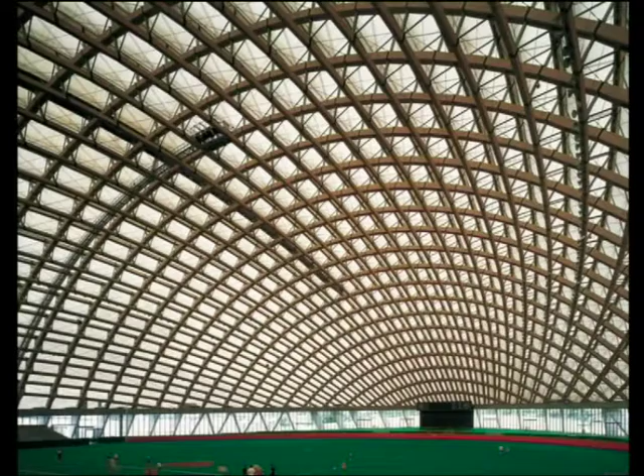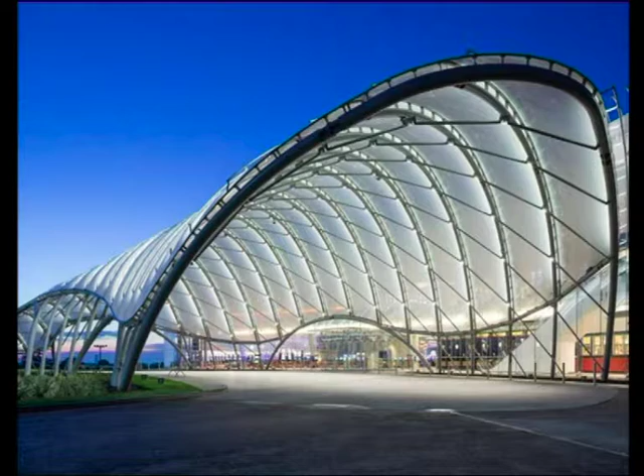So let us get into long span structures. We saw that long span structures can be classified into various types, with different forms, sizes, shapes, and materials. We also saw the early beginnings from the cathedrals and churches built during the Renaissance and Gothic periods. From there till today we have so many massive long span structures based on our functional requirements, congregational requirements, and the size and volume of activities we operate today.

Now we are going to look at long span structures and divide them into different types, but before that we should first understand the different kinds of loading which act on a long span structure.

The first load in any structure is always the dead load of the structure itself, because any structure is made up of some material, and that material has a certain weight which acts as the weight of the structure. Usually dead loads make up most of the loads in many structures, and similarly, long span structures also have dead load as a major component.

Next is the live load. Live load is the sum of all loads which can be moved into and along the building—for example, people, furniture, partitions, electrical equipment, mechanical equipment, and service equipment put onto the building which can be moved from one place to another at some point in time. Live loads also come up to a good amount when you take loading action into consideration.

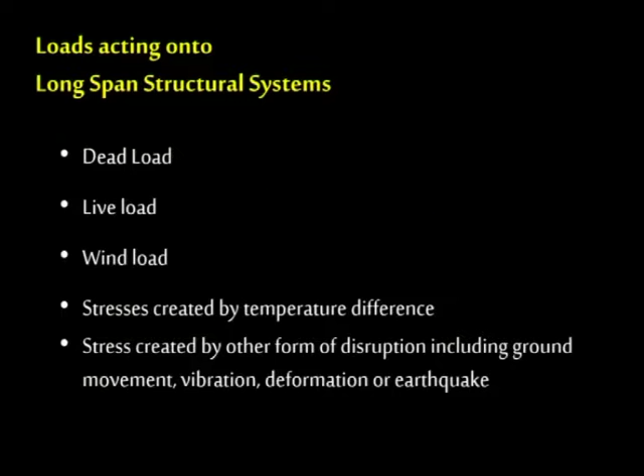This also has some loading action. There are other sources, created in the form of disruption, including ground movement, vibration, deformation, earthquakes, and other forms of natural disasters. All these loads are calculated into a large span structure to make it efficient and usable over a long period of time.

If we are to divide long span structures into different systems, we have four major categories of systems: form active systems, vector active systems, section active systems, and surface active systems. We will look at each of these systems in detail.

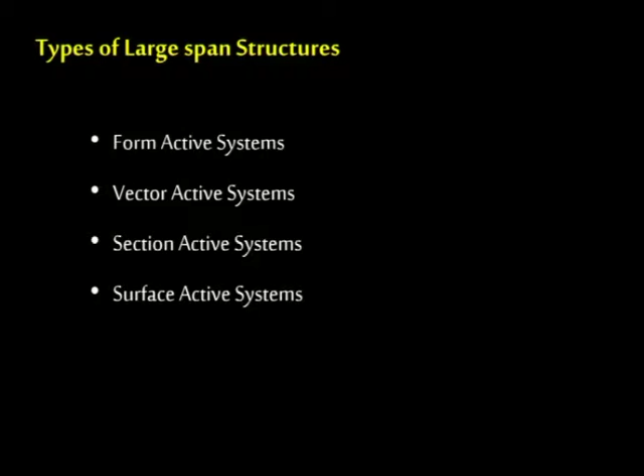First up, we have form active systems. Form active systems are systems of flexible, non-rigid matter in which the redirection of forces is effected by a particular form, design, and characteristic form stabilization. In simpler terms, any element will have a certain form, and the form creates certain strength to the overall structure, in which the structure itself can be flexible. It could be non-rigid, in which the forces can be redirected or changed from one direction to another by a particular form of design.

For example, tent structures. In a tent, we see a mast and then the cloth which forms the element. So these are flexible, non-rigid. At the same time, the overall structure is stable only because of the form of the elements which are in action. Form active systems are again divided into many types of structures: cable structures, tent structures, pneumatic structures, and arch structures.

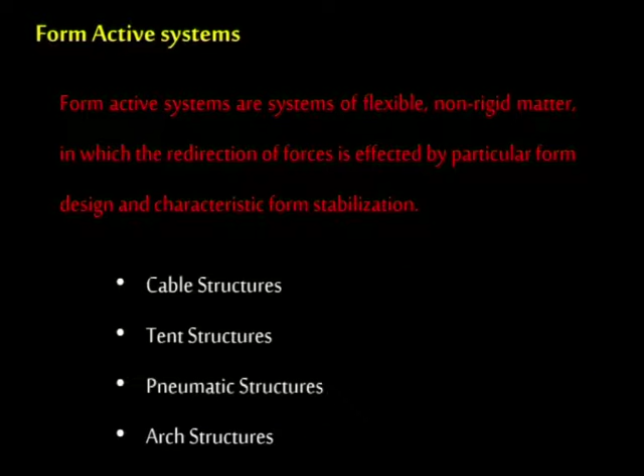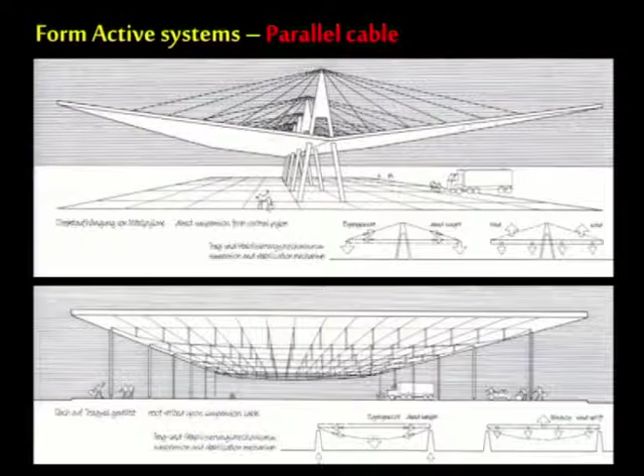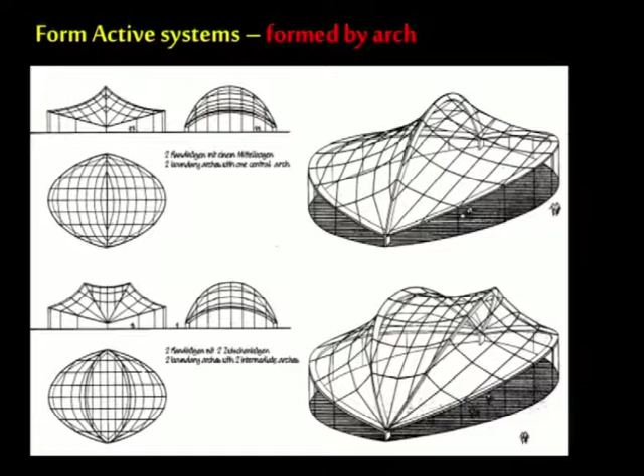Let us look at some examples of each of these structures. These are cable structures, and the picture on top is a parallel cable structure. These are structures formed by an arch action. There is an arch, and the arch is expanded, contracted, made larger, made smaller, and arranged in different sizes and locations. And voila, the structure is formed by a series of arches.

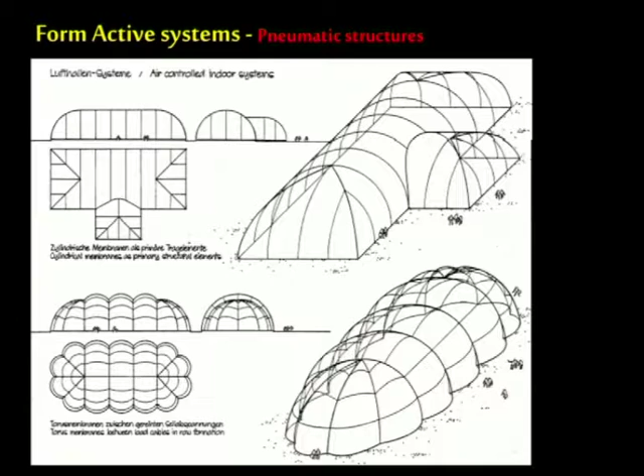These are tented structures, masted structures, multiple tent structures. These are pneumatic structures. Pneumatic structures are structures in which air is controlled inside the element, and we will be looking at pneumatic structures in detail at the end of this same episode.

The next system we are going to look at is vector active systems. Vector active systems are those that have short, solid, straight, linear members in which the redirection of forces is effected by vector partition, that is, by multi-directional splitting of a single force simply into compression or tension elements.

These are elements where the overall structure is divided into multiple short, solid, straight elements. If there is a big element, the element itself is made up of short, small elements, in which the forces are completely redirected within the whole system such that the forces are split into different members. Some members will take tension and some members will take compression.

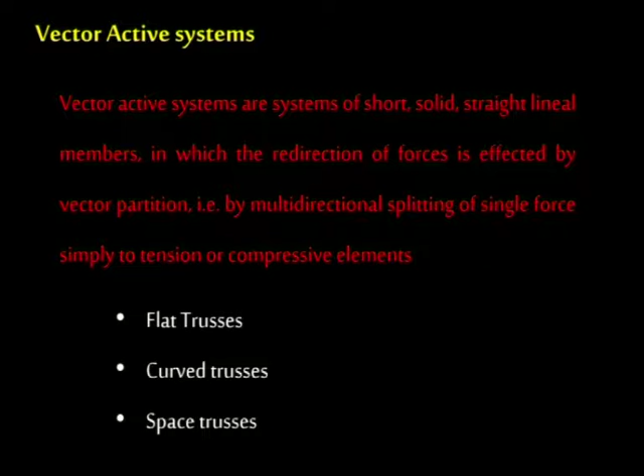For example, trusses. Trusses are the best example for vector active systems. We have different kinds of trusses: flat trusses, curved trusses, space frames, space trusses. We are looking at some pictures of trusses.

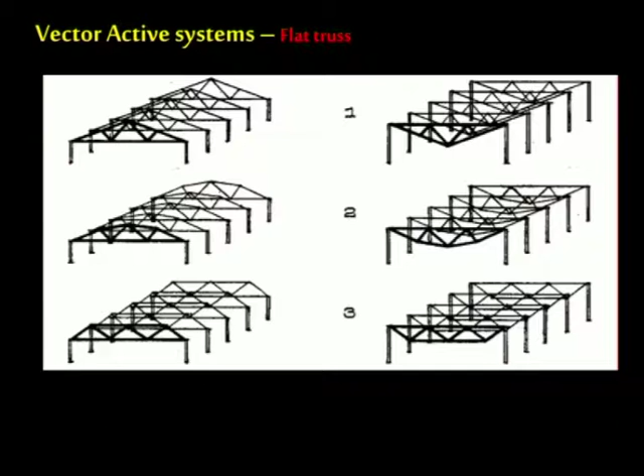These are flat trusses, for example. There are different types of flat trusses: those which have a triangle with the apex on top, and those with the triangle apex at the bottom. And there are curved trusses where we can have a curvilinear roof on top.

Even though these are straight elements, different straight rigid struts which form the overall curve, if you look at the overall form, it looks like an arch, like a curve. That is why we call it curved trusses, even though none of these little elements are curved. All of these elements are straight lines.

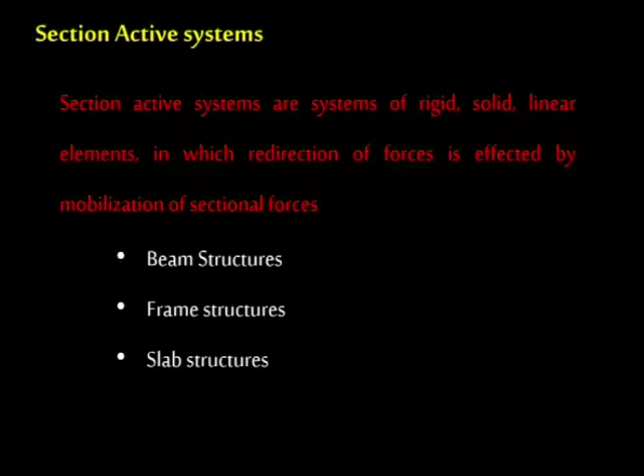The next type of system is section active system. These are again systems of rigid, solid, linear elements in which redirection of forces is clearly effected by simple mobilization of sectional forces. For example, we have slabs, beams, and other frame structures where they are not small items like a truss, they are rigid, solid items, but pretty huge, not small elements.

A column can be as small as a 3-meter column, or it could be something massive like a 12-15-meter column or even more. Similarly, beams can be 3 or 4 meter beams, or it can even be 12-meter, 15-meter beams, depending upon the size, depending upon the loading pattern.

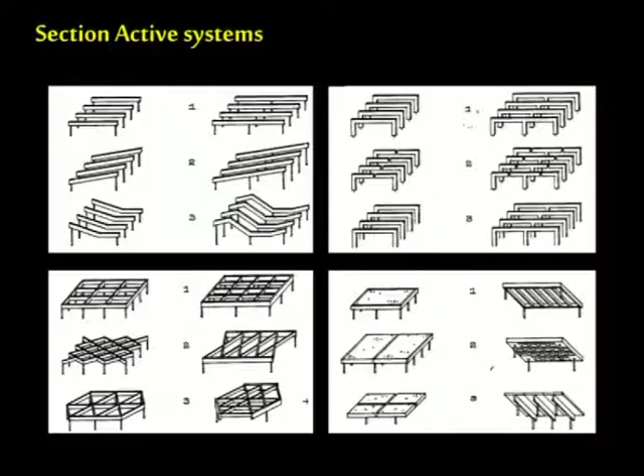Here, the redirection of forces is effected by mobilization of sectional forces. The beam shall have a section, and the section itself will carry both compressive and tensile loads. These are some of the section active systems: beams, slabs, lattice beams, different sectional beams, single section, dual section, slabs. These are sections of a section active system wherein you can see the load action clearly being transferred from a slab to a beam to the next element below.

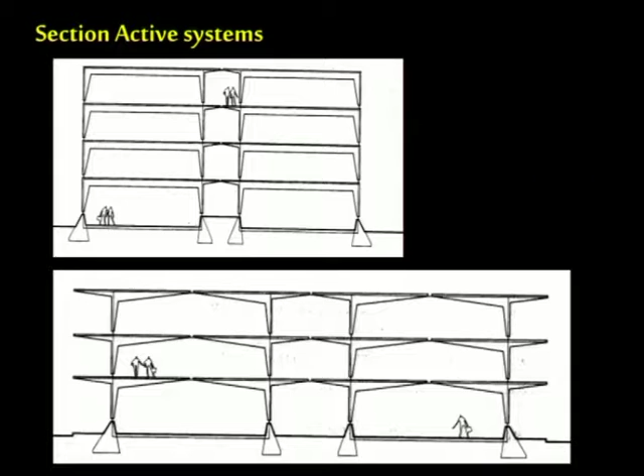The last and final system we are going to look at today is surface active systems. These are flexible or rigid elements, planes, that are able to resist tension, compression or shear, in which the redirection of forces is affected by mobilization of sectional forces.

For example, we have folded structures. We looked at folded plates in the previous episode, where a plane of paper is not able to take up any load if it is flat. At the same time, when that plane of paper was folded multiple times, it was able to take immensely huge loads which we did not expect it to take. Such is the effect of a surface active system.

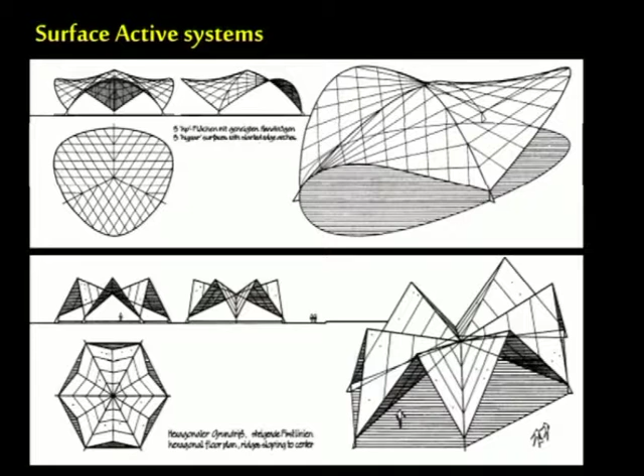These are some of the surface active systems, and these again are some other examples of surface active systems.

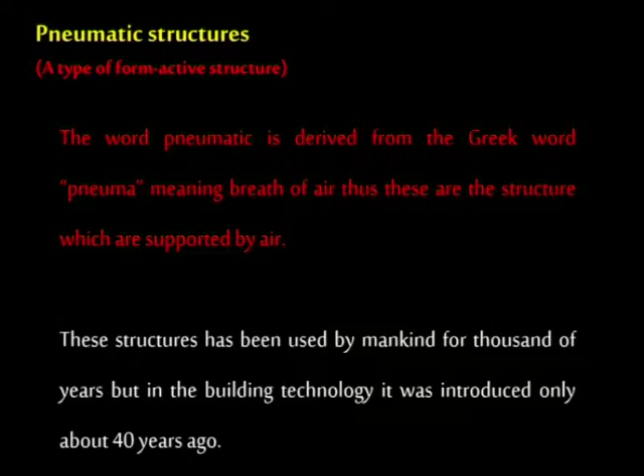Now let's look at pneumatic structures in detail. Pneumatic structures are a type of form active system. If we remember our four main classifications, form active systems were the first of the four, and we saw pneumatic structures as one of the examples of form active systems. If you look at the etymology of the word pneumatic structures, the word pneumatic is derived from the Greek word pneuma, meaning breath of air.

Thus, these are structures which are clearly supported by air. These structures have been used by mankind for thousands of years in building technology, but they were introduced to us in the construction field only about 40-45 years ago. Now let us look at the fundamentals and principles of pneumatic structures, and see how it works.

Its principle is simple. It uses a relatively thin membrane supported by a pressure difference. There is air outside the membrane, there is air inside the membrane, and there is a pressure difference between these two, and that pressure difference is what keeps the membrane afloat.

So through increasing the air pressure inside, there are two real advantages which we get. The dead weight of the space is clearly balanced, because the weight of the substance is not directly taken by the load itself, but because of the difference in air pressure, the dead weight is balanced. The membrane is stressed to the point where it cannot be indented by asymmetrical loading.

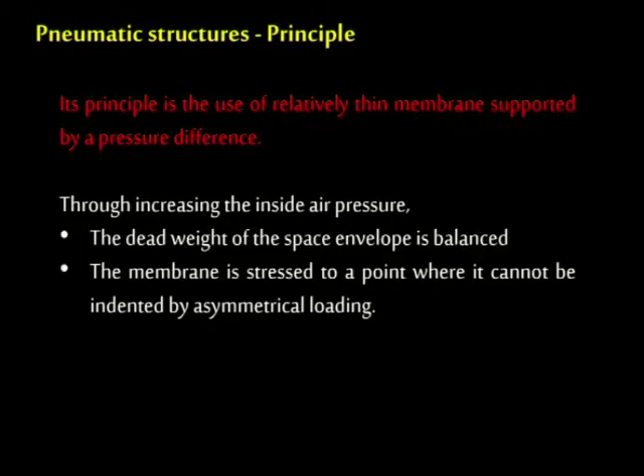It's air, a fluidic substance. It can take up any space which is there. It takes the shape of the structure in which it is holding. The membrane is stressed in such a way that there is no one point where the loading can become more or less, and thereby disrupt the whole structural system. That cannot happen in a pneumatic system usually.

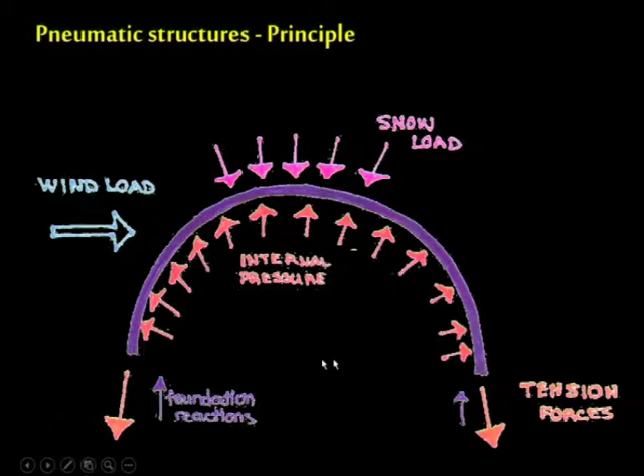In this picture, you see this membrane being stretched on both sides, and from the internal side, there is an air pressure which acts on the surface throughout, so that the membrane's size, form and shape are retained. On top, there are wind loads, snow loads, and of course gravitational load happening, and there are some foundation reactions which counteract the tension forces at the bottom. So thereby the overall structure is retained in a perfectly intact condition.

Here again, pneumatic structures are classified into two major types. One is the air supported systems, and another is the air inflated systems. These are the pictures of air supported systems on the left, and there is an air inflated system on the right.

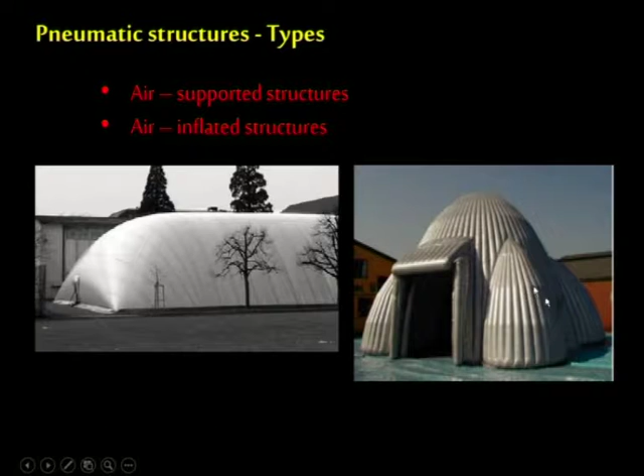Let's look at technically the difference between an air supported system and an air inflated system. If you look at the slide, it says it consists of a single membrane supported by a small internal pressure difference, and the internal volume of a building's air is consequently at a pressure higher than atmospheric pressure.

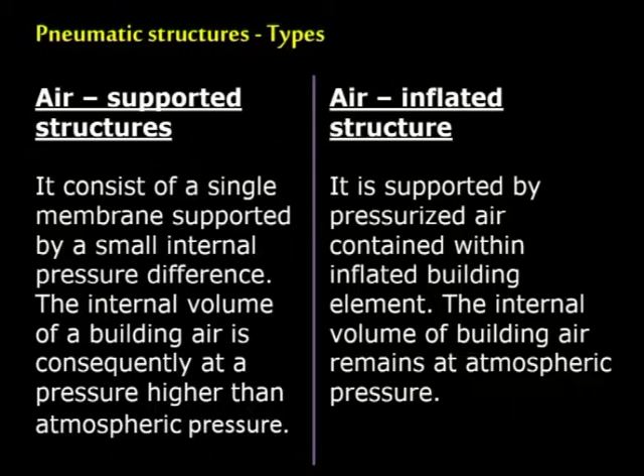For example, it consists of a single membrane. There is a small pressure difference between the external air and the internal air. The internal volume of air is at a higher pressure than atmospheric pressure, because there is a higher pressure on the inside, so an equal pressure is applied on the membrane in such a way that it is kept afloat.

Whereas in an air inflated structure, it is supported by pressurized air contained within an inflated building element. The internal volume of building air remains at atmospheric pressure. So this means there is no single element, there are two elements, and there is pressurized air happening inside. The internal air is at the same pressure as the atmospheric air.

If you look at the pressure diagram, you see there is one element from where there is an equal internal pressure acting from the inside, and there are wind loads, snow loads, and gravitational loads acting on the outside. The internal air pressure is higher than the external air pressure, thereby maintaining the rigidity of the form.

Here in an air inflated structure, there are two membranes with internal pressure between them, such that the whole system is kept afloat because of this internal pressure, and the air inside and the air outside are of the same pressure.

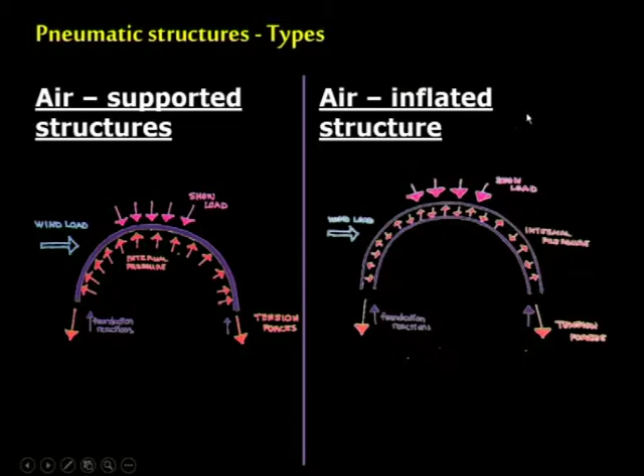Now let us look at the different components in a pneumatic structure. There are four main components which we need to understand. The first component is the envelope. The envelope is the skin of the overall pneumatic structure, and it could be made of practically any material that can be stretched. The usual materials are polyurethane, polythene, and other synthetic rubber.

And the other thing we need to understand is the pumping equipment. We need pumping equipment that constantly keeps the system set up. When setting up this whole pneumatic structure, we need pumping equipment so that we can set up the system in a relatively quicker time.

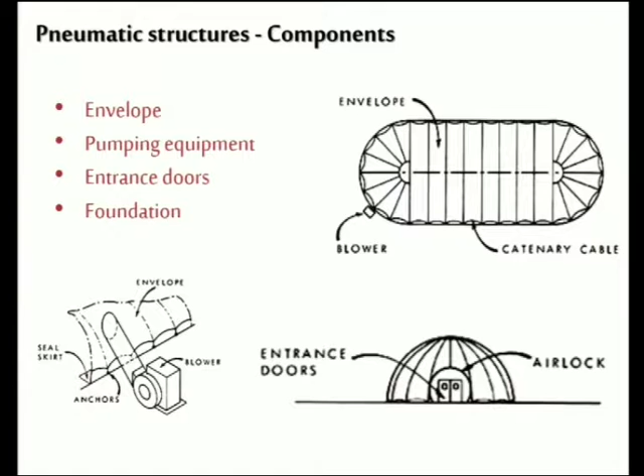Next, we need to understand how air locks act at an entrance door. When entering or exiting a pneumatic structure, if you open the door and there is a pressure difference between the internal and external air, that pressure difference gets neutralized the moment you open the door. We cannot allow that to happen. So we use an air lock system, where the pressure remains the same even after the door is opened. There is an air lock system installed at all entrance doors, which acts as a pressure barrier.

And next is foundation. The foundation depends upon the longevity of the structure, and it also depends upon the kind of element and kind of material which we use.

Next we will look at the different advantages and usual characteristics of pneumatic structures. From the slide we can see that it is a lightweight structure, and it spans relatively large spans compared to other structures. We are talking about extremely lightweight structures, and very large span structures, because theoretically a pneumatic structure does not have a ceiling limit of span.

Theoretically, we are talking about kilometers of span, ranging from 30, 36, up to 40 kilometers, which can theoretically be done by a pneumatic structure. Pneumatic structures are also pretty safe compared to other structures, because even if there is a structural failure, there are no rigid heavy elements that are going to fall off from the building.

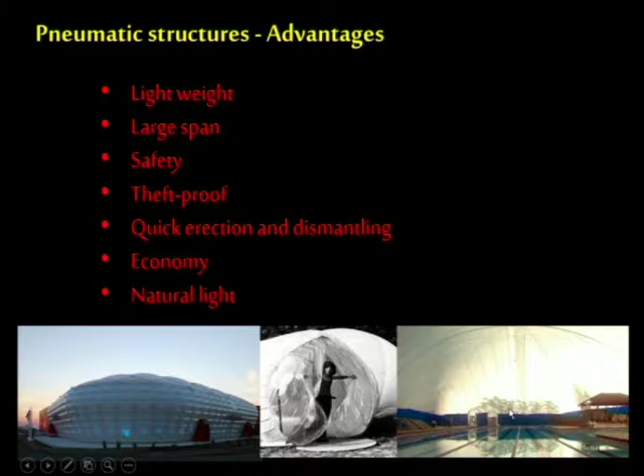And it also produces a lot of natural light inside. If you see in this corner picture here, we see that there is a lot of natural light that can be brought into the building, and the amount of natural light which can be brought in ranges from 50 to 80%, depending upon the material of the fabric.

Talking about the material of the fabric, we will look at some of the materials we can use. There are two basic types: isotropic materials and anisotropic materials. To tell you simply, an isotropic material produces the same elastic, same structural properties on any side or axis, whereas an anisotropic material has different properties when you expand it in a different way.

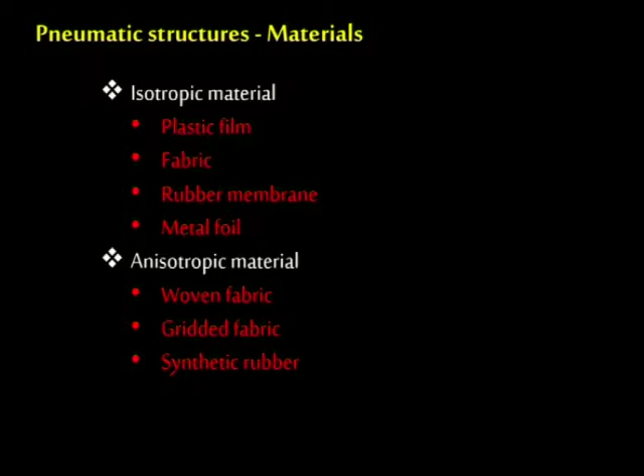A simple example will be a woven fabric where there are only 2 axes of threads, and if you apply force on one particular axis, the fabric tears up exactly in that spot. That is because it is anisotropic. So isotropic materials such as plastic films, elastomers, rubber membranes, and metal foils can all be used in pneumatic structures. In anisotropic materials, we have woven fabric, gridded fabric, and synthetic rubber which can be used to get pneumatic structures.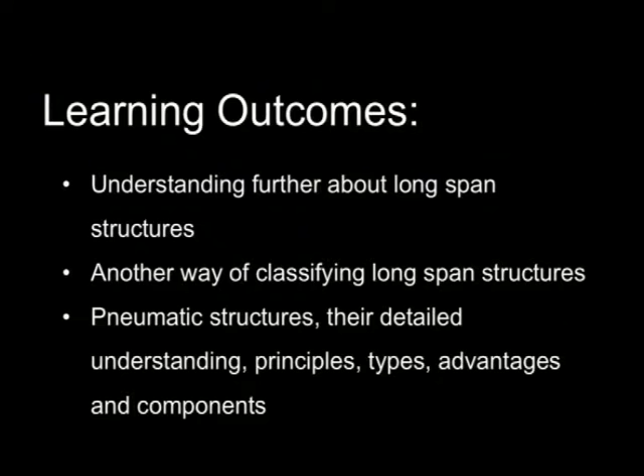Now we have come to the end of this lecture, so we will look at the different learning outcomes we have studied so far. We have got a broad understanding further into the realm of long span structures, wherein we tried to classify long span structures in terms of systems. We saw 4 different types of systems, and we also saw pneumatic structures in detail. We understood their principles, the different types of pneumatic structures, the different components used in a pneumatic structure, and their advantages, as well as the different materials which can be used to make pneumatic structures.

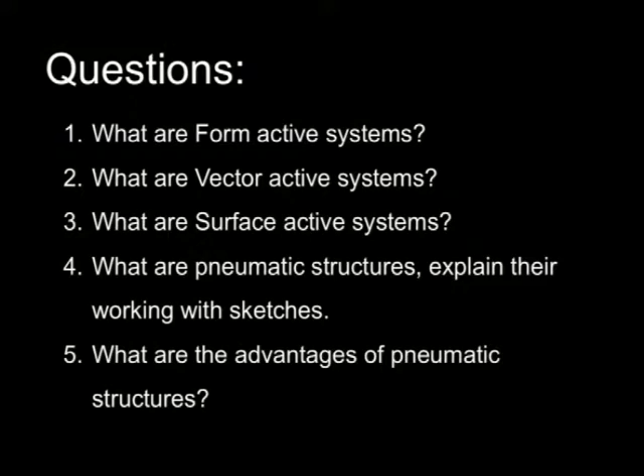So with these learning outcomes, we should be able to answer some of these questions here. Let's see if you can get it right. What are form active systems? Explain them with sketches. What are vector active systems? What are surface active systems? What are pneumatic structures? Explain their working with relevant sketches. What are the advantages of pneumatic structures? You should be able to answer these questions by having attended this lecture series.